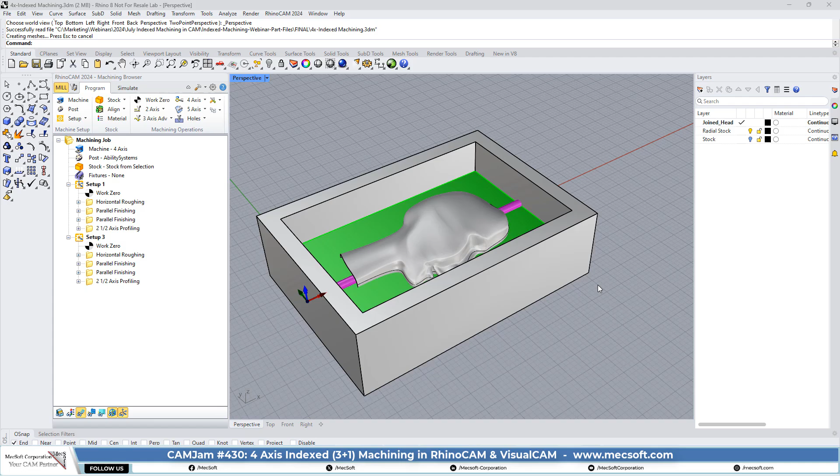Okay, so what you're looking at here is a two-sided machining job. We want to machine this meshed surface here. It's the shape of a face, and we want to machine obviously on two sides. So let's take a moment to just look at the geometry we have.

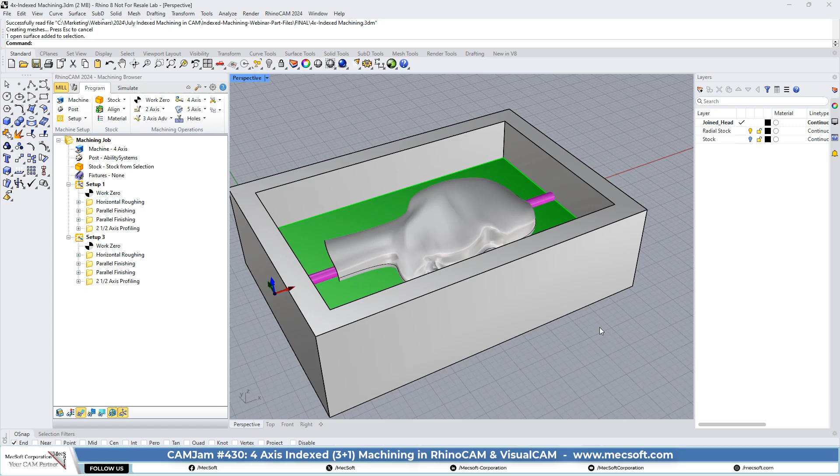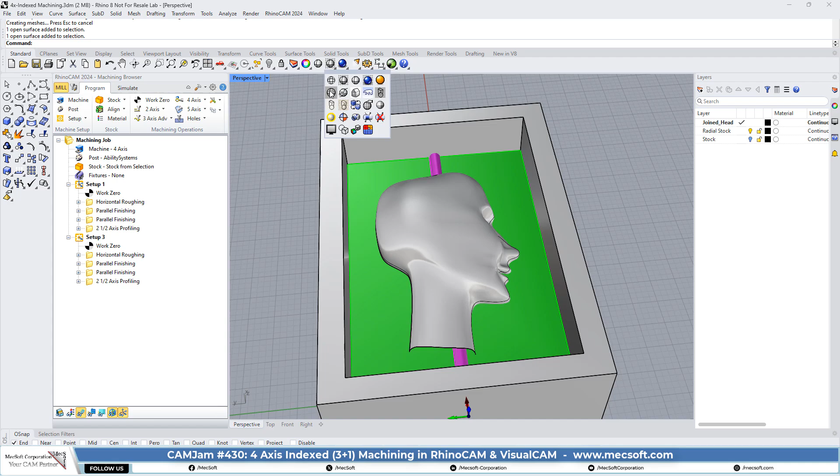We have the original mesh. We also have a magenta colored cylinder going all the way through. So let's go ahead and let's change it so we can see through that. So you'll see that this cylinder passes all the way through the part, and it actually extends into the box

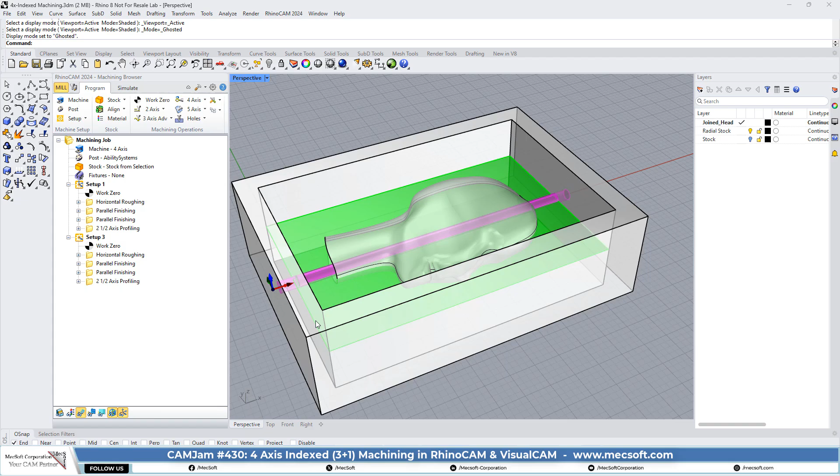stock on each end. Okay, and what that's going to do is, after we're done machining, that's going to have material there that held it to the stock, but that you'll be able to remove manually and get that part out. So we also have the box, of course. The entire stock is shaped like a box. And let's go up here and just make sure our stock definition, copy model bounding box. Okay, so we got our stock, which is a box.

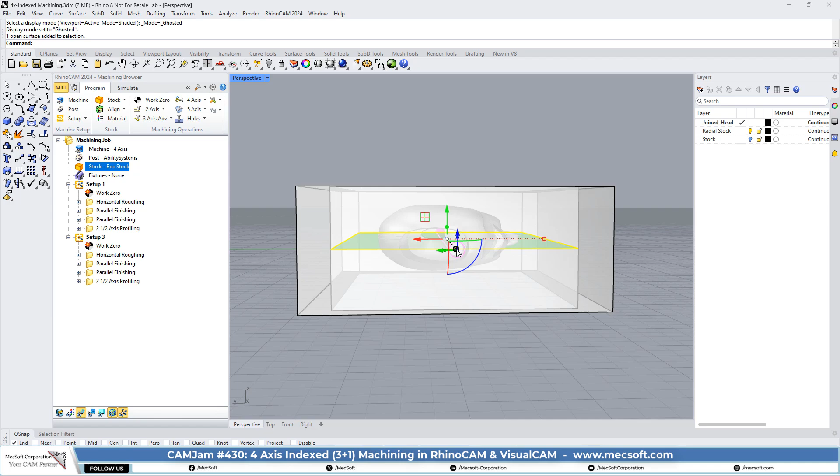And we also have the surface here, this planar surface, which we have placed at the center line, and it passes through that magenta cylinder, and that's going to serve as a containment in the z-axis. We won't be able to machine any deeper than that.

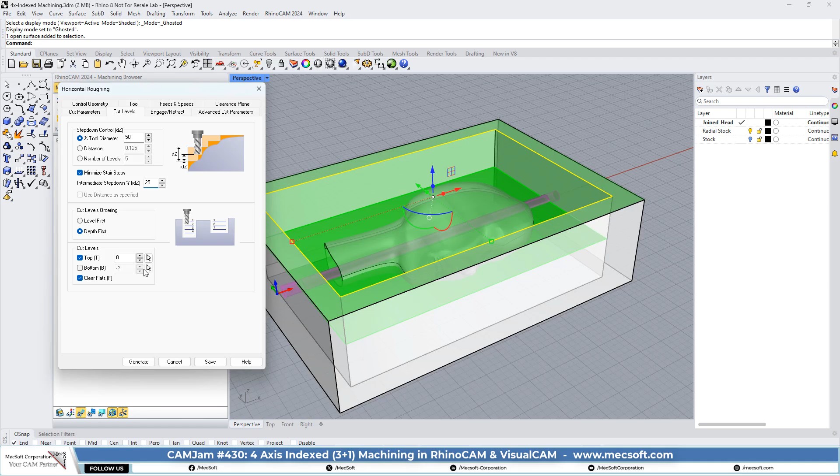And what's good, I mean, you can go ahead and have a z-level bottom. We can tell it not to machine any further than a certain level. Okay. But this is just another option. It allows you to tweak the surface up and down if you want to machine a little bit deeper and clean up the perimeter edge a little bit better.

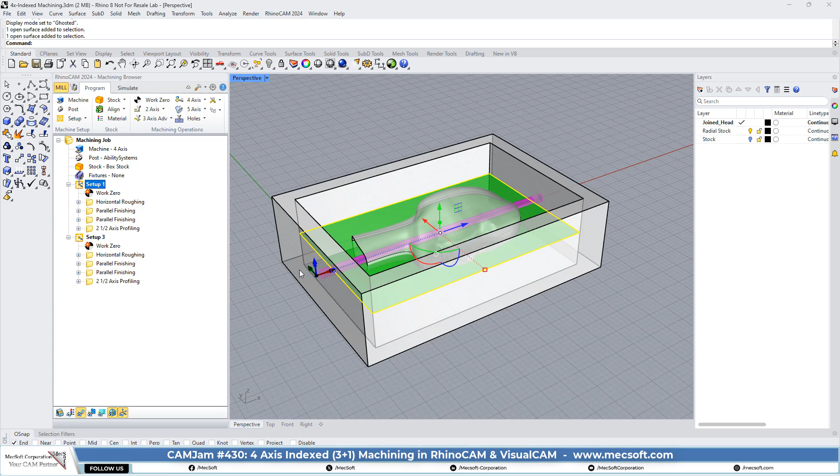So let's go ahead and look at our setups. We have setup 1, which is the default orientation setup. Okay, so it's oriented right here at our world coordinate origin there. Okay, and then we have work 0, which is also located at the world coordinate system. And let's just regenerate that.

And then we have a rotate table setup, and you can do this rotate table setup from up here. Rotate table setup, and let's just click on there. And you'll see that we're doing 180-degree rotation. So we're flipping it over 180 degrees.

And also, if you're interested in the machine definition, let's go up here. Our machine definition is set to manual, and its number of axes is set to 4 axes. And it's a table. The rotating axis is on the table, not on the head.

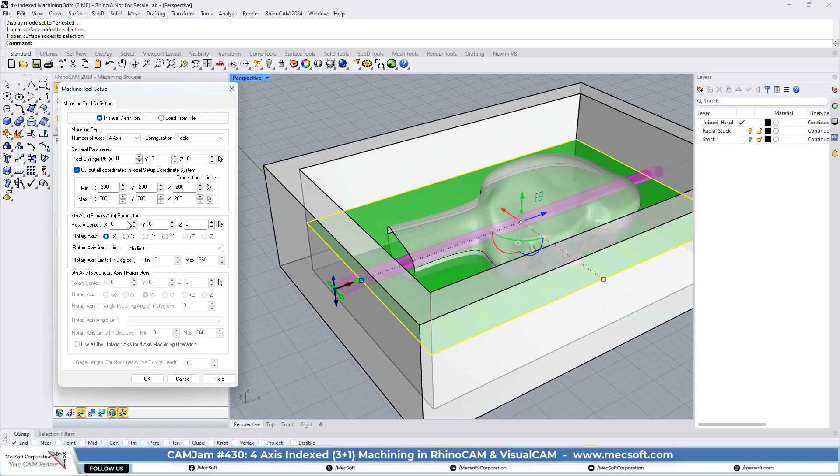Okay. And then also we have the rotation, the 4th axis, which is the primary axis, set to positive X. So if you'll see here, the green arrow is extending in the positive X direction. So that's how you set up the machine for 4 axes. And let's go ahead and generate this work 0.

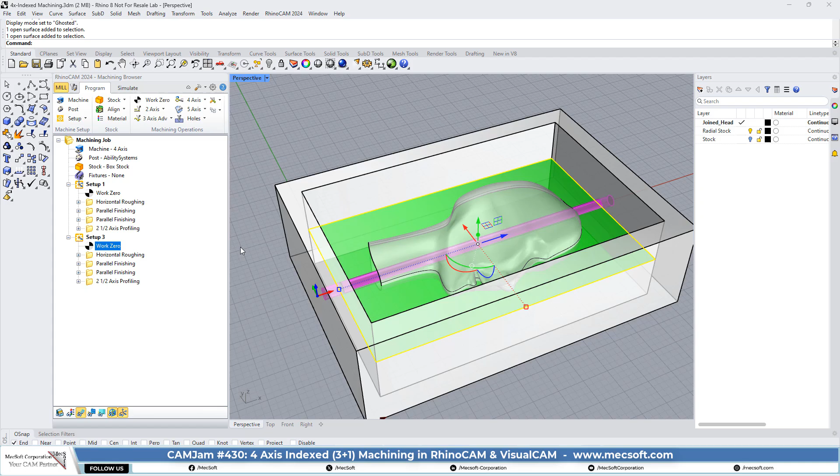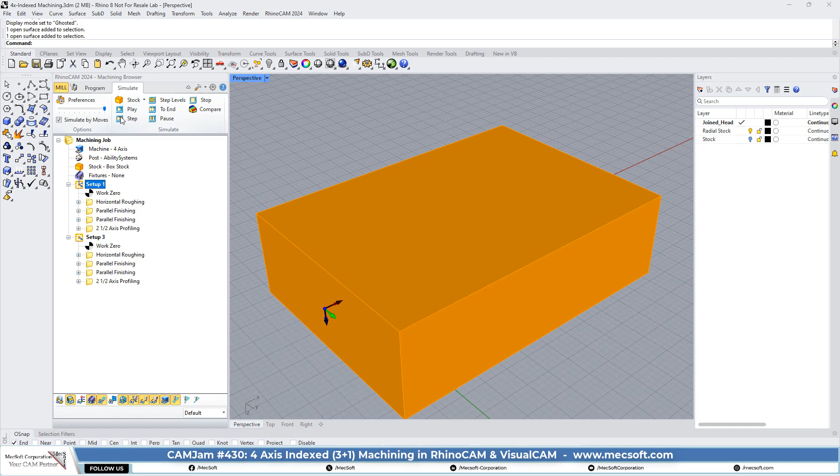Okay. So we add a rotate table setup to rotate that stock over, and then we're actually just copying the same operations from setup 1 down to the second setup. Let's go ahead and do a simulation. Let's do it by setups. Setup 1. Let's go ahead and regenerate that.

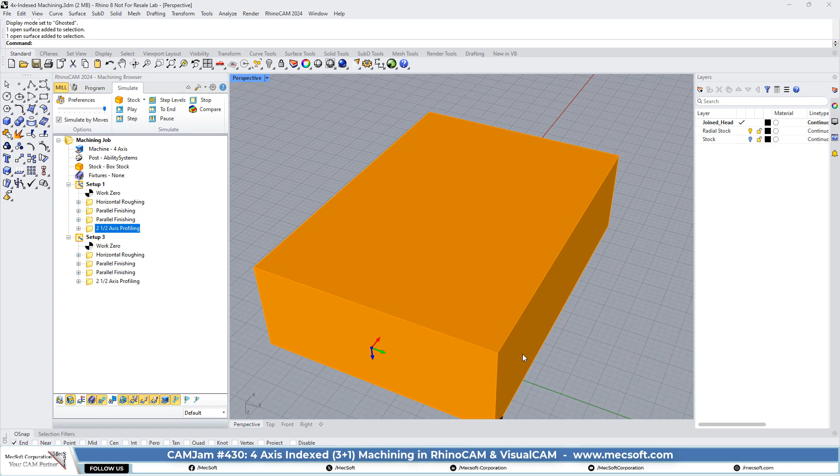Okay, so let's go simulate setup 1. That's on the top side. As you recall, we did the top side first, and then setup 3. Okay, so let's get rid of the toolpath, and we have our machined head connected to the stock with that rod, and you just cut this off and get that machined part out.